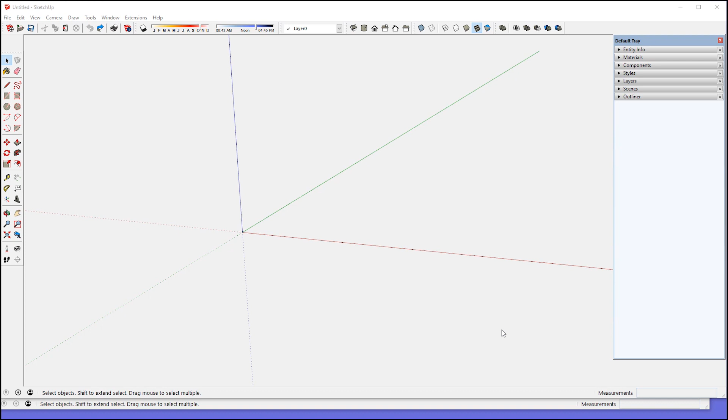I'm interested in creating a small sign for my shop. It would be a carved sign with my company name and some other logo, and I will design something here in SketchUp for that sign. And starting with a face that would be the sheet of paper size, 11 by 8.5,

and I'll go to a front view here and also a camera parallel projection. First thing is I would like the name of my company that I would carve out, and I will use some letters here, the 3D text feature in SketchUp with a height of 7/8 of an inch for the lettering, and it's Garamond font, which I like to carve. It's a Roman style letter font, and I need to type in my company name.

And then place on the sheet of paper, I'll place it about right here. And I want that to be black lettering. And I'll use a V tool to carve those letters. But now I need a logo. I would like a piece of furniture to show up in this area right here, and I've picked a Queen Anne chair that I've just designed,

and here it is, cabriole legs and so on, and I'll copy this model and then come back to my sign design and do an edit paste. And of course I've got a huge chair and I need to scale that down. Pick the scale tool

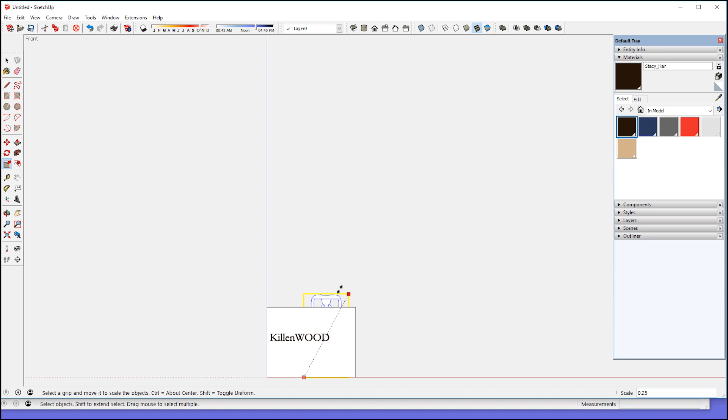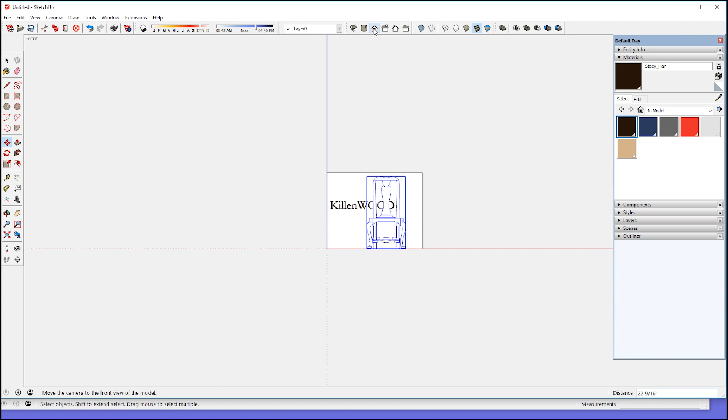and come down, but I need to bring that out in front of the piece of paper. So I'll bring it out here, go back to the front view, and scale again. Maybe about that size. Let's see how that fits. And then come over on the red and then come back up on the blue.

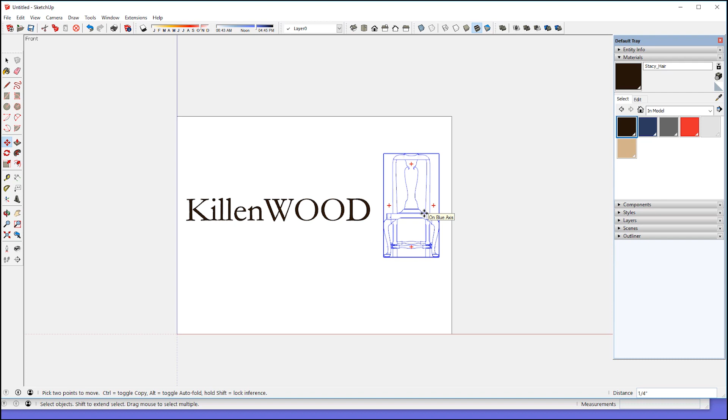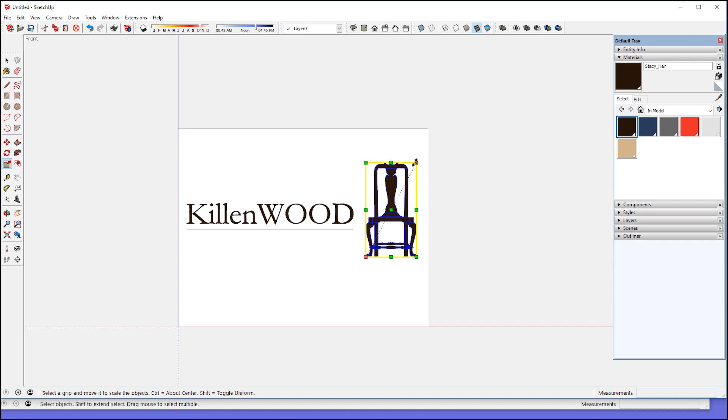And I want this to be black as well. So now I've got a silhouette of the chair, and then I want to have an underline on the company, and that looks like something I can carve. Let me bring this down just a little bit. Okay. I'll make a group.

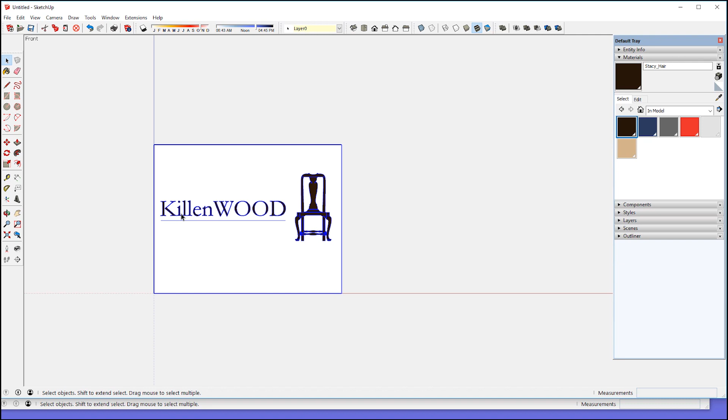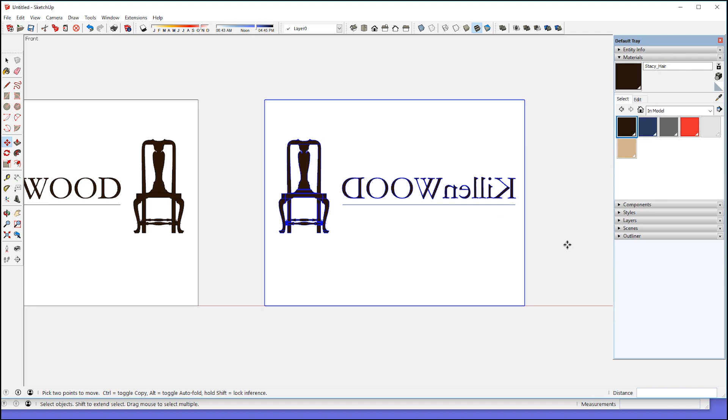I will have to transfer this design to the piece of wood that I will carve. And so I need a mirror image of this print. I'll copy the group over here and then flip along red, and I have a mirror image now that I can print full size, take down to the shop and do the acetone transfer of the laser print to the piece of wood for carving.